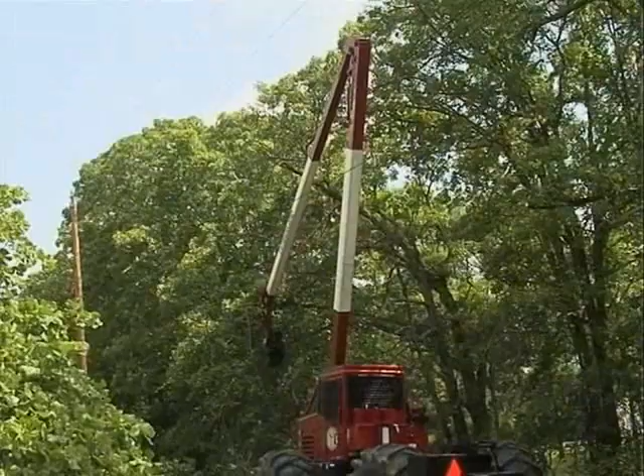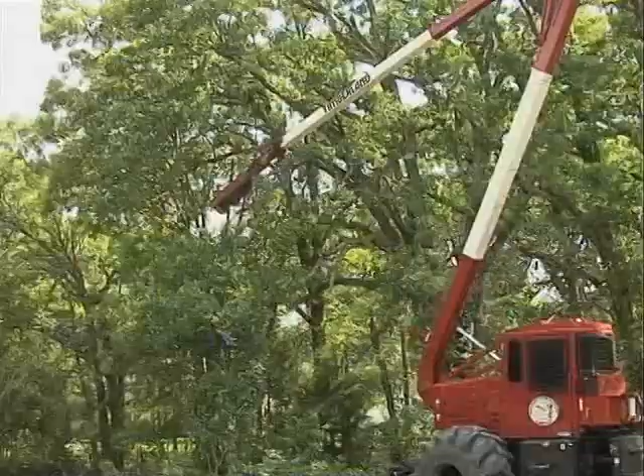It's recommended that all tree trimming operations are carried out by two-man teams. One person operates the tree trimmer, while the other is checking out the area ahead for potential obstacles such as guy wires, service lines, and fences. The operator should make sure no other personnel are close to the operating machine. The two operators should stay in constant contact with one another by means of prearranged and approved hand signaling or radio communication.

To start a trimming operation, position the carrier parallel to the edge of the right-of-way so that the face to be trimmed is 1 to 2 feet away from the side of the machine. Approach any area where overhanging electrical power lines are present with extreme caution. Lowering the dozer blade provides a stable, solid foundation for the trimming operation. It also provides a natural ground connection in the event an electrical conductor comes into contact with the machine.

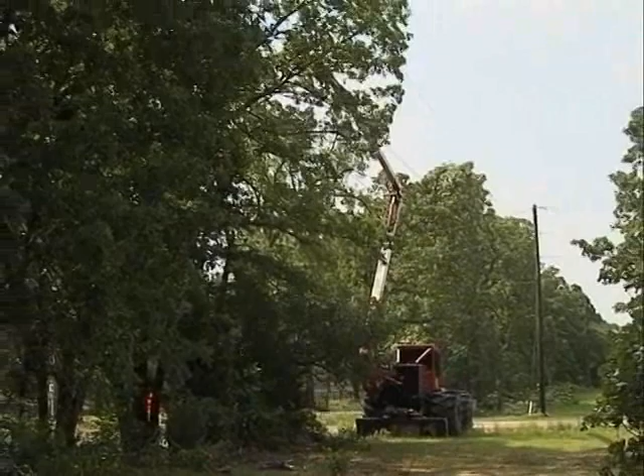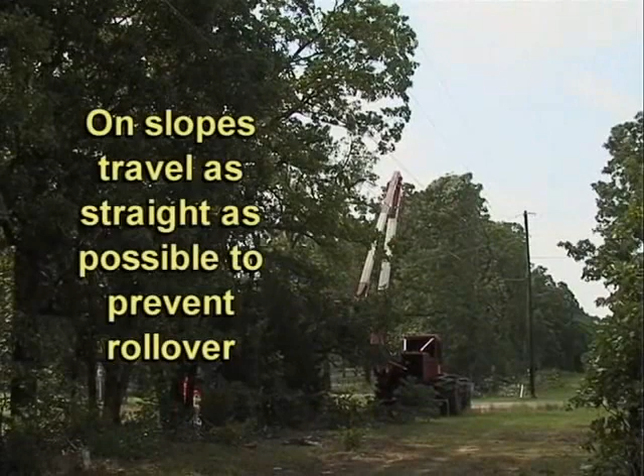Unless the right-of-way is sloping, the boom tilt frame should be kept in its neutral position. If the machine is positioned on an incline, adjust the boom frame to compensate so that vertical face trimming or vertical reach and topping can be accomplished. If you have to work on slopes, travel as straight up and down as possible to prevent rollover. The engine should be in first gear when driving down the slope to maximize the engine braking.

By lifting and lowering the upper boom in sweeping motions and raising the main boom in increments at the end of each sweep, the entire area of reach will be effectively trimmed. The wand assembly is designed so that cutting of branches may be done in both upward and downward sweeps. When cutting branches 3 to 10 inches in diameter, always cut from above in order to prevent stalling and binding the saw blades.

Once the practical limit of the trimming boom extensions is reached, lower the booms to rest and move the machine forward until the pivot point of the main boom and frame line up with the last swath. Then continue the trimming operation. It's recommended to limit trimming to an area that's well within the range of vision from the normal seated position of the operator.

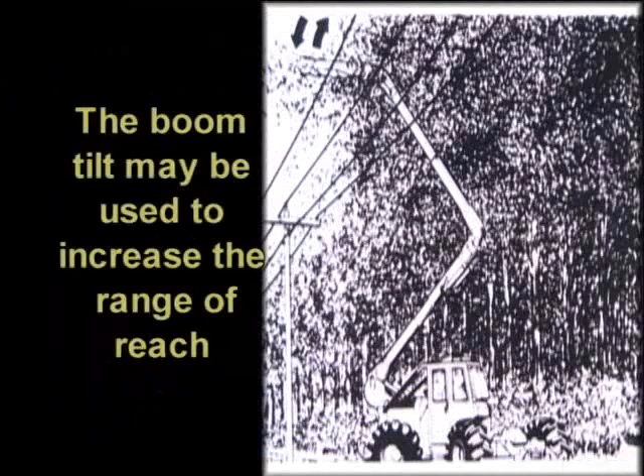To trim dense overgrowth or large branches reaching in over power lines, it's recommended to trim the branches in smaller pieces to avoid foul-up of debris on live wires. To do this, position the machine and raise the booms so that the wand is situated higher than the branches to be trimmed. Trim overhanging branches using the upper boom motion. If necessary, the boom tilt may be used to increase the range of reach, providing that the tilt is kept within the maximum range on the boom tilt indicator and the machine is firmly situated on solid ground.

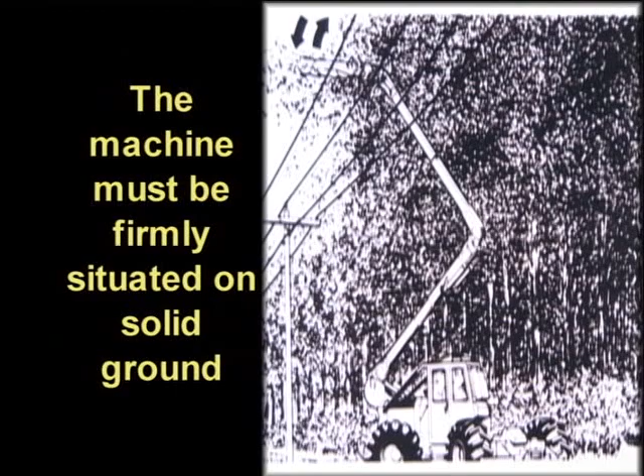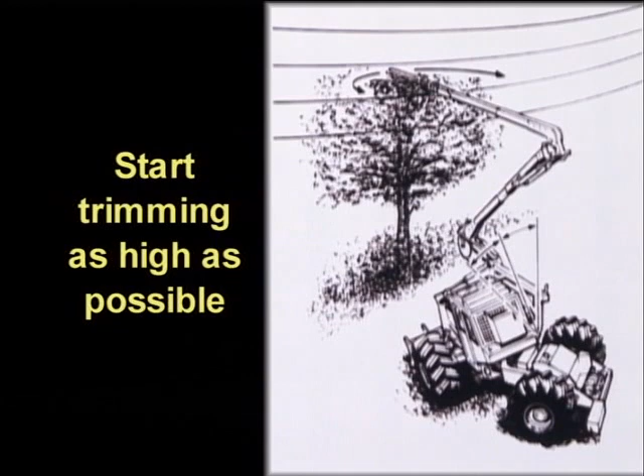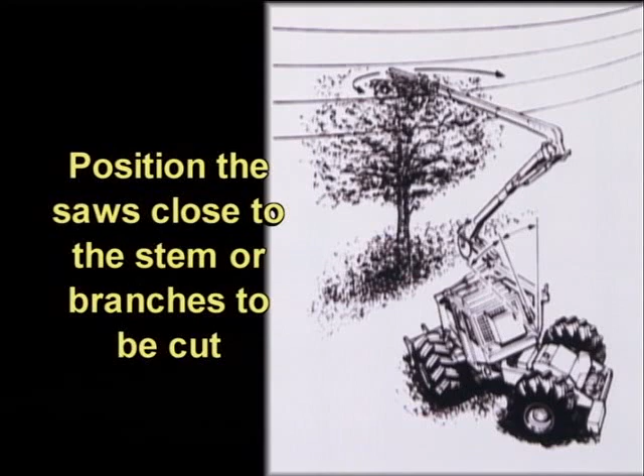To trim undergrowth, insert the wand between neutral lines or between one neutral and one non-energized TV or telephone line only. Always ensure that sufficient clearance is present. Start trimming as high as possible to prevent large debris from getting entangled in the wires. Cut the treetop down in small pieces until the top is below the lowest hanging wire. Each time the wand is inserted between 2 or more wires, position the saws close to the stem or branches to be cut and perform the trimming with a left-right sweep of the wand.

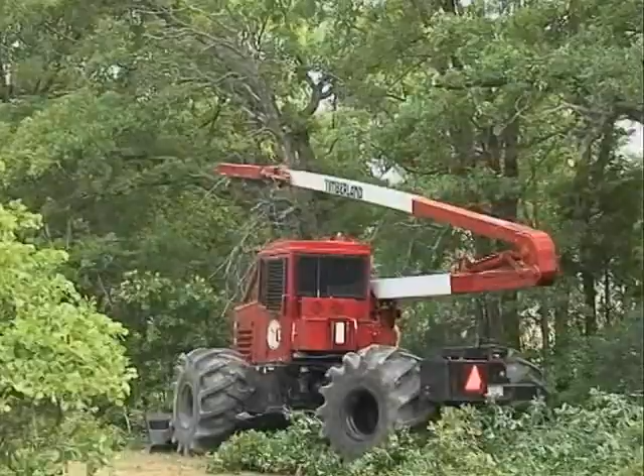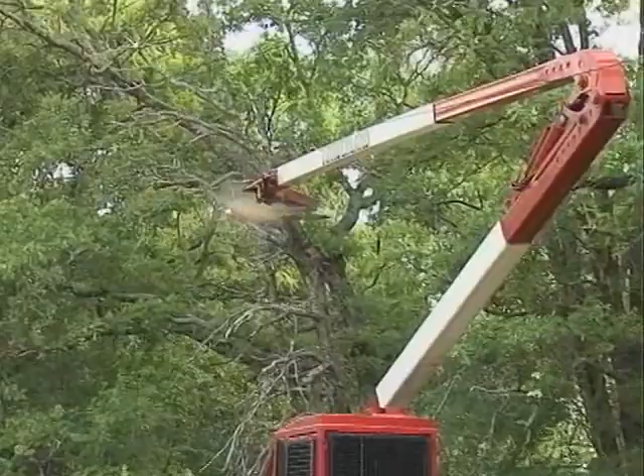Any tree may be topped in order to stunt its growth. To do this, position the saws beside the treetop at the desired cutting height and cut with a left-right sweeping motion of the wand. If the saw jams while in the middle of a cut, stop the saw motor drive immediately and reverse the motion that jammed the saws. If the jam occurred while using the upward motion of the upper boom, try to lower the boom. Under no circumstances should the carrier be moved in an attempt to free a jammed blade.

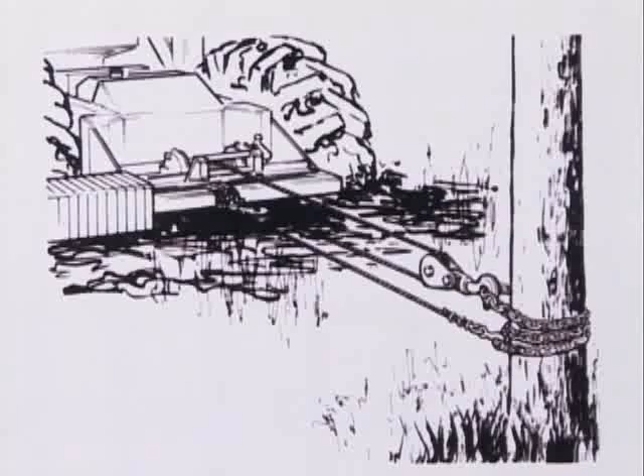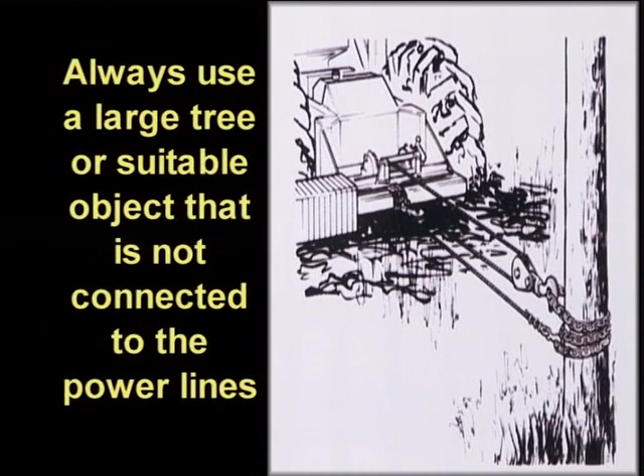Recovery of the machine from soft or swampy ground can be accomplished by attaching a block and tackle to a soundly rooted tree and attaching the winch cable. Never use a power line pole as an anchor post for the winch cable. Always use a large tree or other suitable object that's not connected to the power lines. The carrier transmission should be in neutral, and the winch alone should be used to pull the machine free.

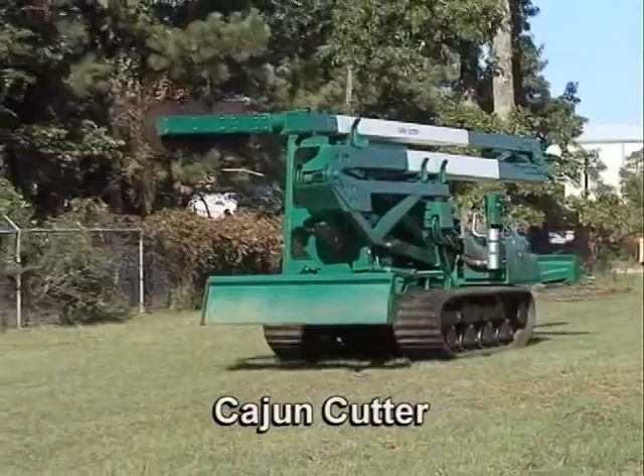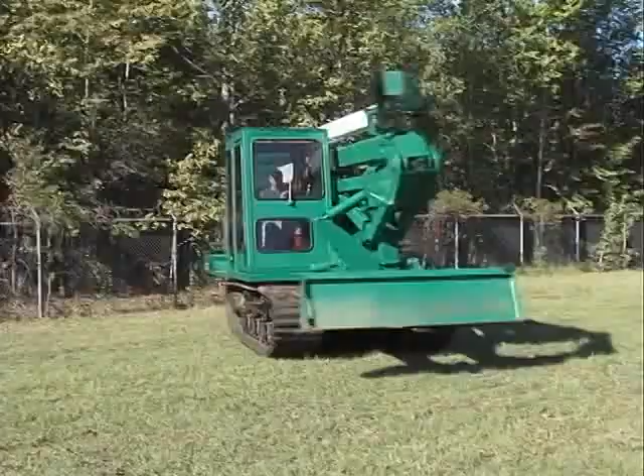In addition to the T700 unit, TSE offers the Cajun Cutter. Designed to complement its product line, the Cajun Cutter is a lighter, smaller unit that can be transported without the need of permits. Offering similar tree trimming capabilities as the T700, the Cajun Cutter uses a rubber track carrier with an independent hydrostatic drive propulsion system. This allows the unit to turn around within its own length and minimizes any potential damage to roadways and driveways. Although tramming speeds are slower than the unit with tires, the ease of maneuvering and transport makes this unit a strong performance alternative.

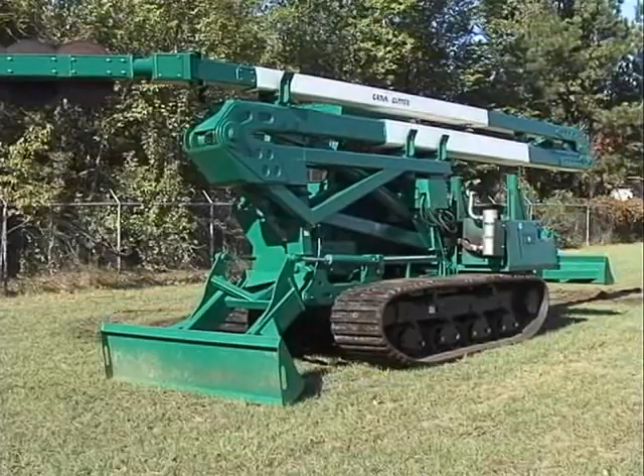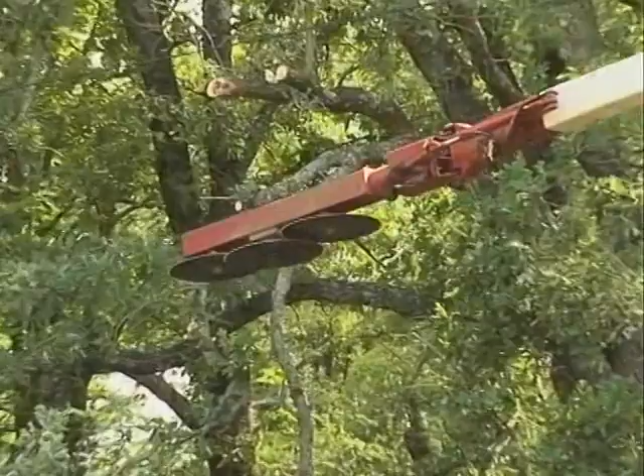TSE International Incorporated's policy is to produce products that are safe and reliable. It's the job of the operator to know how to safely operate the machine, to minimize risks and promote safety at all times. After all, nothing will ever replace a careful and informed operator.